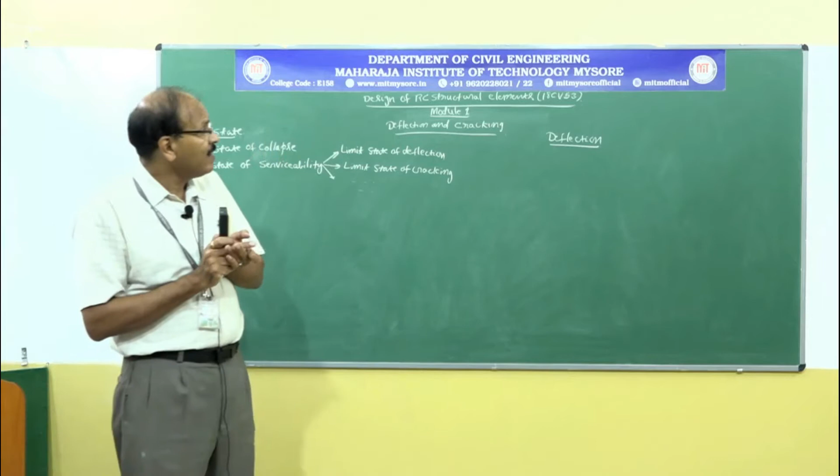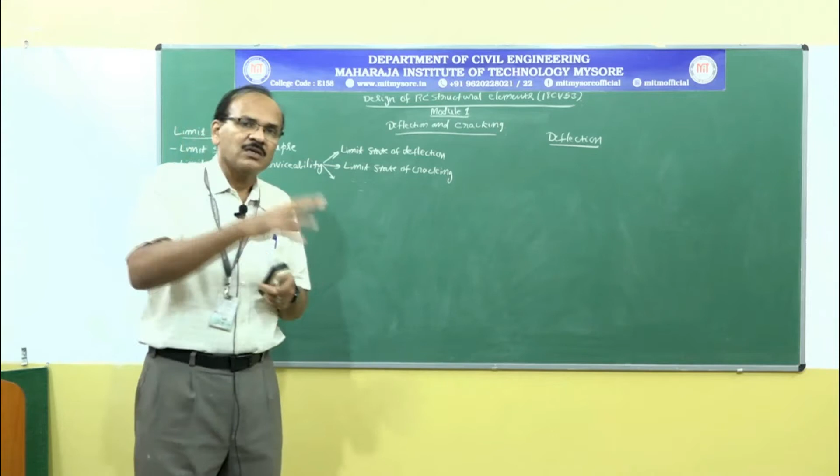Those are elastic deflections, and long term deflections are the deflections that happen due to shrinkage of concrete, temperature variation, and creep of concrete. Those are all long term deflection. So total deflection is short term plus long term deflection, and total deflection is normally 2 to 3 times the immediate or short term deflection.

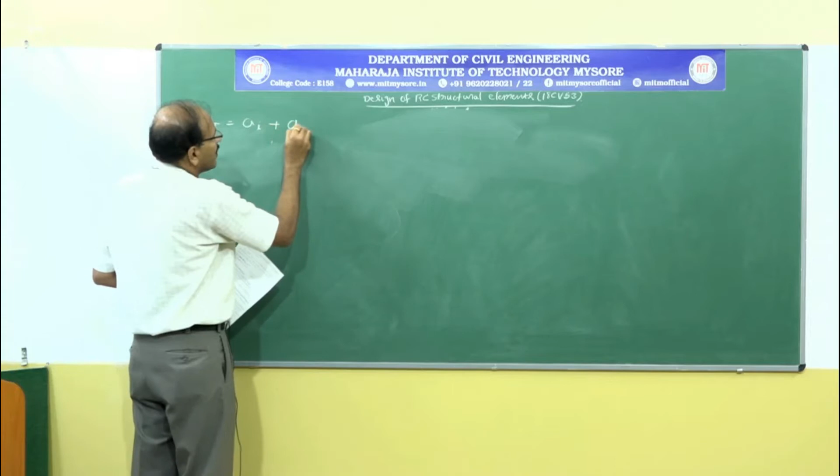To start with, let me take the deflection part. AT equal to total deflection: one is AI, the immediate deflection, plus ALT, the long term deflection. Short term deflection plus long term deflection can further be divided into ACS plus ACC plus ATP - that is deflection due to shrinkage, deflection due to creep, and deflection due to temperature change.

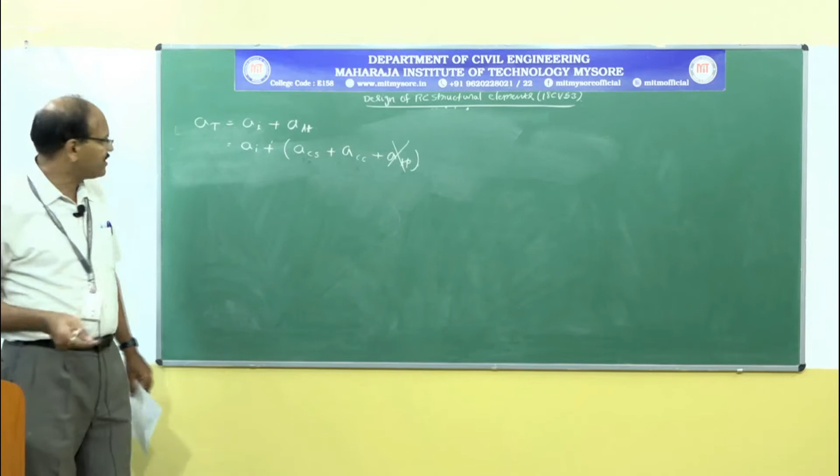In this class we don't deal with temperature deflection because it is not so significant under normal temperature. We are going to find out what is the total deflection of a structural element under these remaining cases.

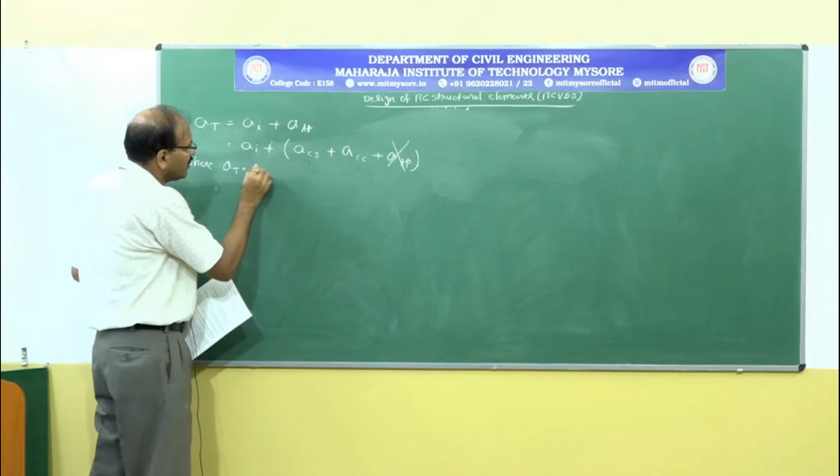AT equals total deflection, then deflection due to shrinkage of concrete and deflection due to creep of concrete. AI is short term or immediate deflection, and ALT is long term deflection.

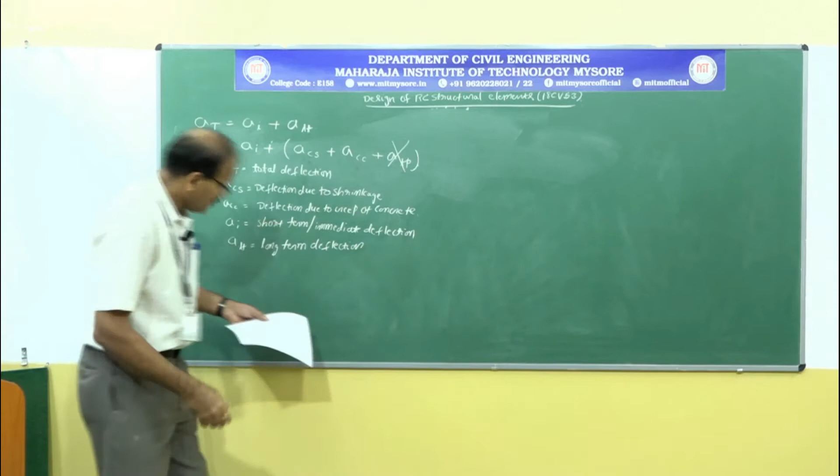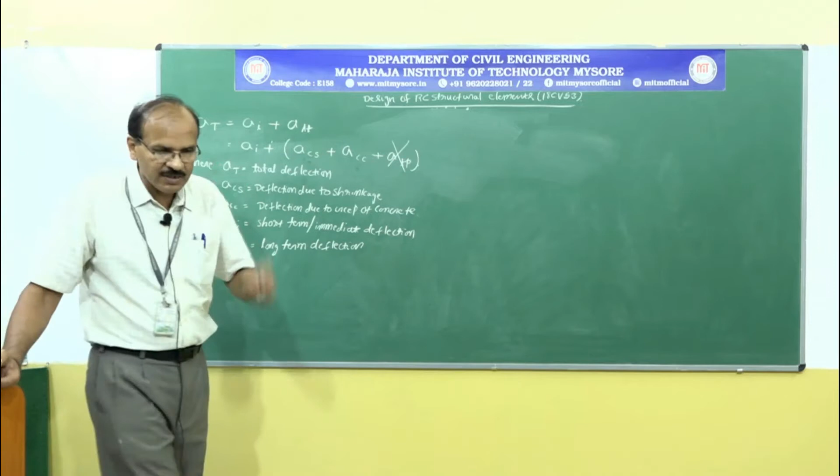Deflection should not exceed certain limits, and we have to keep the deflection as minimum as possible. So how do we keep the deflection as minimum as possible? As per the codal recommendation, we have to maintain certain L by D ratio. L is the span of the structural element and D is the effective depth. We have to maintain those values within certain limits so that deflection is under control.

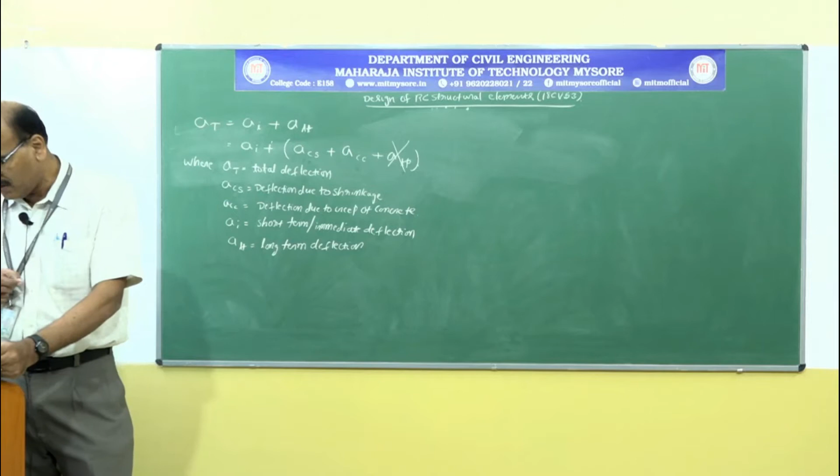If you go to page number 37 under clause 23.2, I am going to read out: the deflection of a structure or part thereof shall not adversely affect the appearance or efficiency of the structure or finished partitions.

The deflection shall generally be limited to the following: the final deflection due to all loads, including the effect of temperature, creep and shrinkage, and measured from the as-cast level of the supports of floors, roofs and all other horizontal members, should not normally exceed span divided by 250. What it means is the final deflection, that is the immediate deflection plus long term deflection, should not exceed or be greater than span divided by 250.

Again, the deflection including the effects of temperature, creep and shrinkage occurring after erection of partitions and the application of finishes should not normally exceed span divided by 350 or 20 mm, whichever is less. What that means is the deflection due to temperature plus creep plus shrinkage should not be greater than span divided by 350. What exactly it means is the total deflection should not exceed this much. The total deflection is the short term deflection plus the long term deflection, and it should not exceed this.

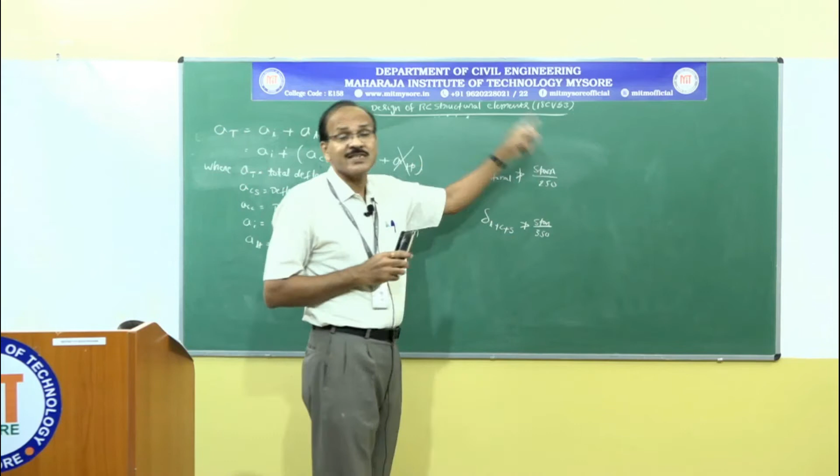Next, when it comes to control of deflection, we have to follow certain guidelines given by the code. When we follow those guidelines, the deflection will be under control, meaning these conditions are generally satisfied. So what are the codal recommendations? Under clause 23.2.1, it says the vertical deflection limits may generally be assumed to be satisfied provided that the span to depth ratios are not greater than the values obtained as below.

That means in the majority of cases, if we follow, for example for cantilever, the basic values of span to effective depth ratios for spans up to 10 meters is 7. For simply supported, it is 20. For continuous, it is 26. If the span of any structural element crosses 10 meters, we have to give certain corrections as per the codal recommendation. This is how we control deflection, and in some structures, if for practical reasons we cannot stick to these L by D ratio conditions, then go ahead and provide whatever the situation demands for the design.

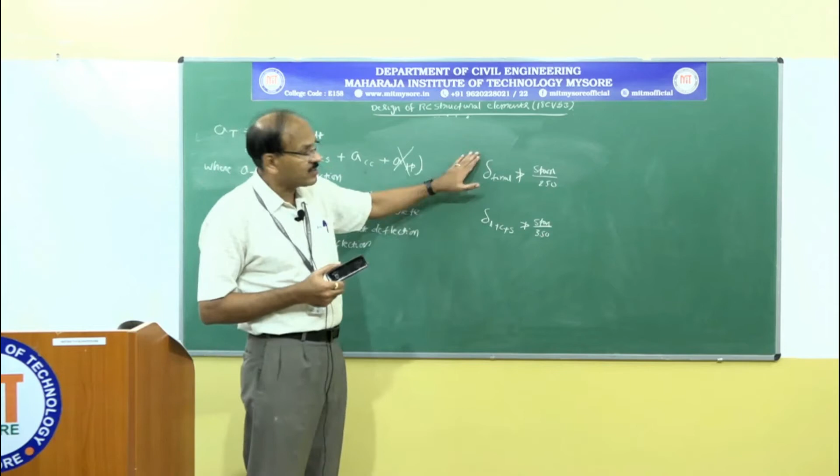In such cases, when checking for deflection, you have to check for the actual deflection using all the complex formulas given in the code. Once you calculate those values, make sure they satisfy these two conditions.

So next, how do we reduce the deflection? The deflection can be reduced in different ways, one being by increasing the depth of the section. When you increase the depth of the section, the moment of inertia increases. Moment of inertia comes in the denominator of the deflection formula, so once the moment of inertia increases, the deflection reduces. By increasing the depth, we can reduce the deflection significantly.

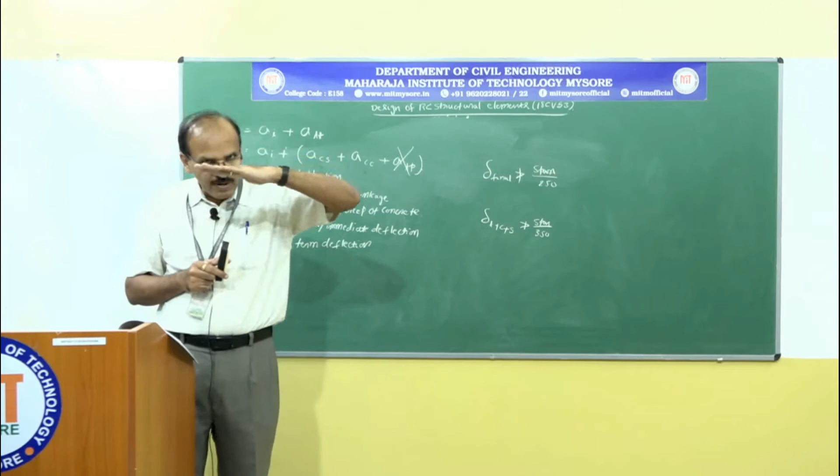Not only that, we can also reduce the deflection by widening the width of the structural member. For example, if I take a beam and increase the width, we can reduce the deflection as well. By using richer concrete, we can reduce deflection, and also by providing camber for the beam or slab at the middle within certain limits. Once you provide the camber, under self-weight and external load the slab or beam will try to flatten, which also reduces deflection. And also by making use of the T-section: when casting a beam along with the floor, it serves as a T-beam, so by adopting T-beam design we can definitely reduce deflections.

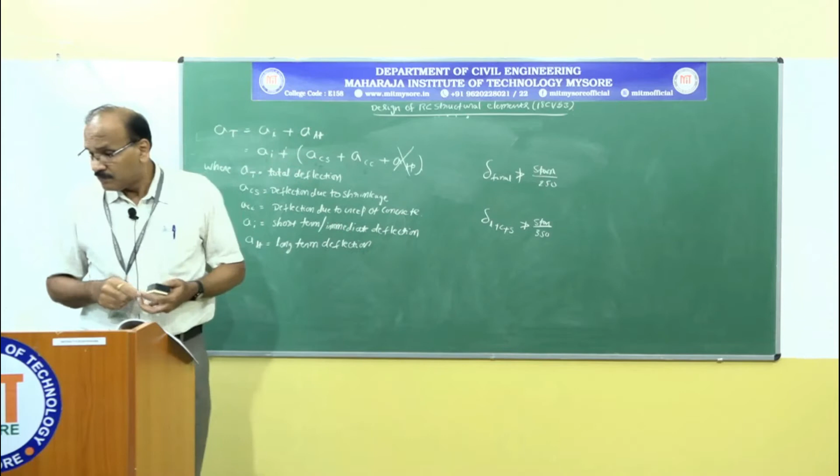Let us take up an example: a cantilever of 3.5 meter span, 300 millimeter wide and 600 millimeter deep. It is subjected to a maximum bending moment of 125 kilonewton meter due to uniformly distributed service loads, of which 50% of the moment is due to permanent loads. The beam is reinforced with 4 bars of 20 mm diameter at an effective cover of 50 mm in the tension zone. Check the beam for deflection.

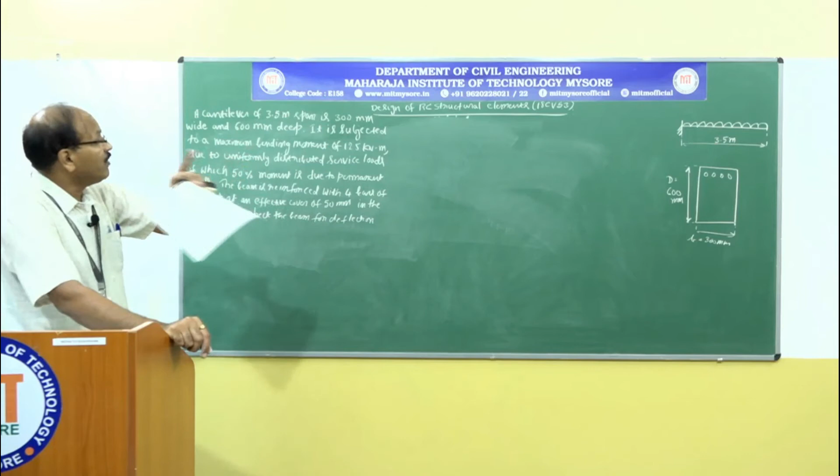It is subjected to a maximum bending moment of 125 kilonewton meter due to uniformly distributed service loads. Whenever we calculate deflection, we always make use of the service load, not the ultimate load or the design load.

Due to the service load, the moment we get is 125 kilonewton meter, of which 50% moment is due to permanent loads. So total service moment is 125 kilonewton meter, out of which 50%, that is 62.5 kilonewton meter, is the moment due to permanent loads.

The beam is reinforced with 4 bars of 20 mm diameter at an effective cover of 50 mm in the tension zone. Check the beam for deflection.

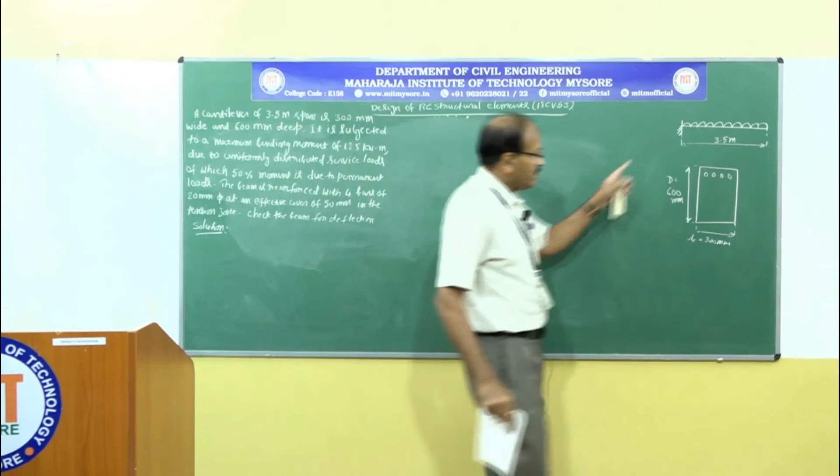Because this is a cantilever, tension happens at the top. That's why we provide reinforcement at the top, 50 mm cover, with 4 bars of 20 mm diameter, and we need to calculate the total deflection due to the load.

Let me write down what is given in the problem. Cantilever length L equal to 3.5 meter, breadth B equal to 300 millimeter, and total depth D equal to 600 millimeter.

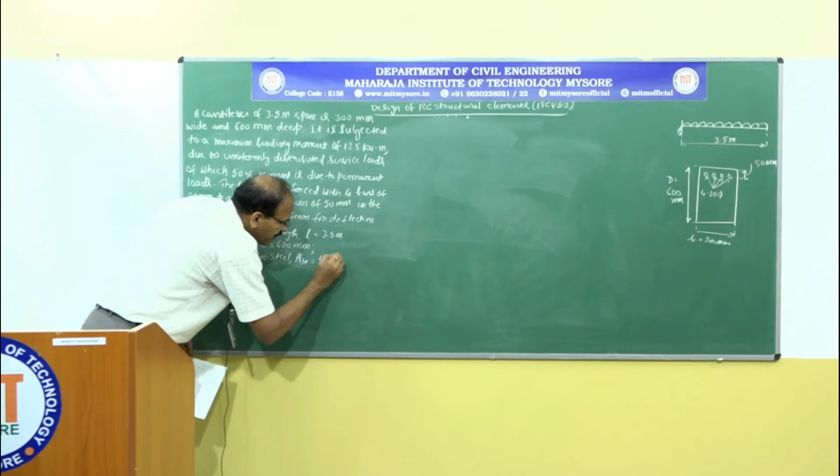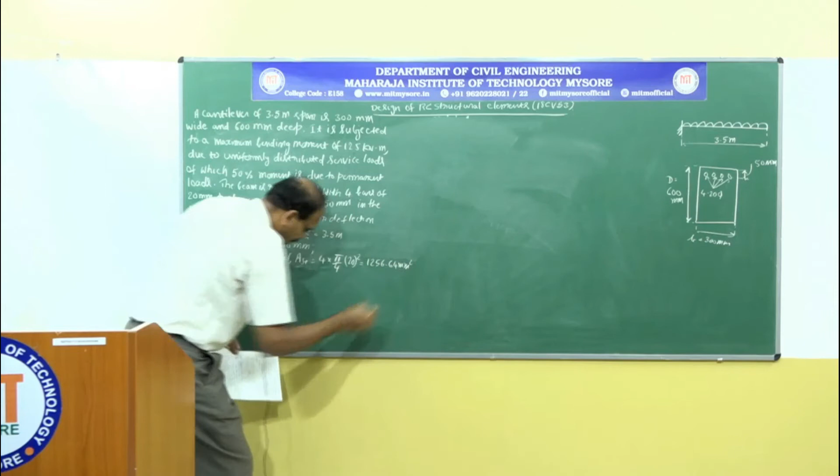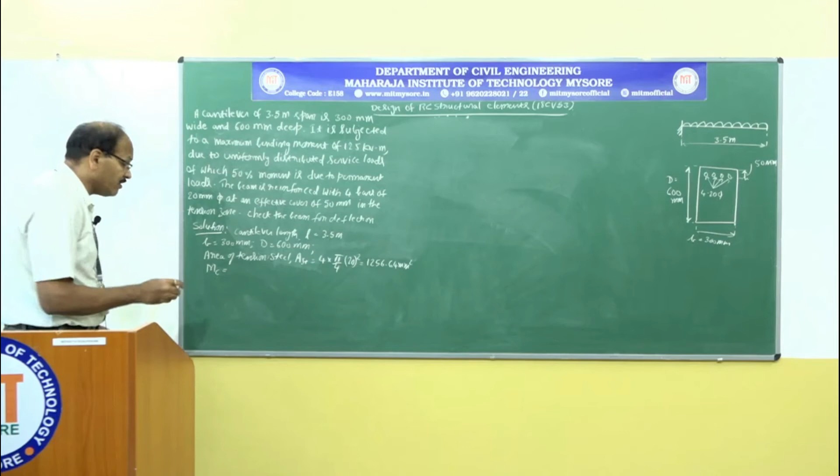Area of tension steel AST equal to 4 multiplied by pi by 4, 20 square, that is equal to 1256.64 millimeter square, and MC, that is the total maximum bending moment due to service load, is 125 kilonewton meter, or 125 into 10 to the power of 6 Newton millimeter.

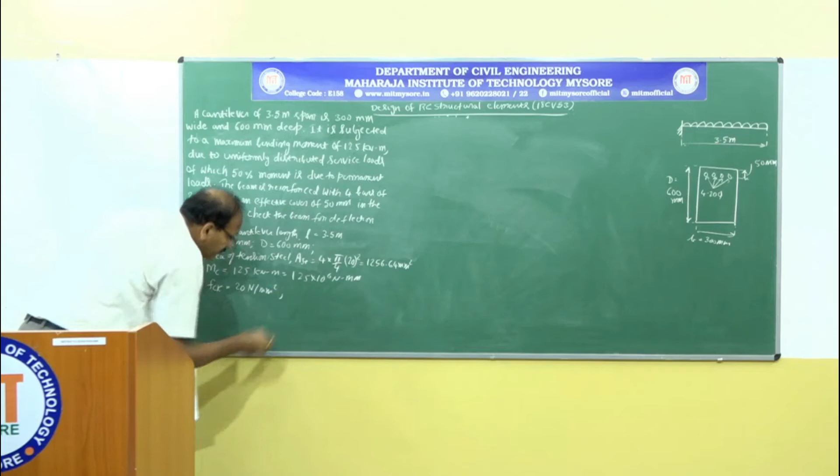The concrete we are going to make use of is 20 Newton per millimeter square, and the steel we are going to use is 415 Newton per millimeter square.

As we discussed, total deflection AT equal to AI plus long term deflection, that is equal to AI plus deflection due to creep and deflection due to shrinkage. I am going to call this equation 1.

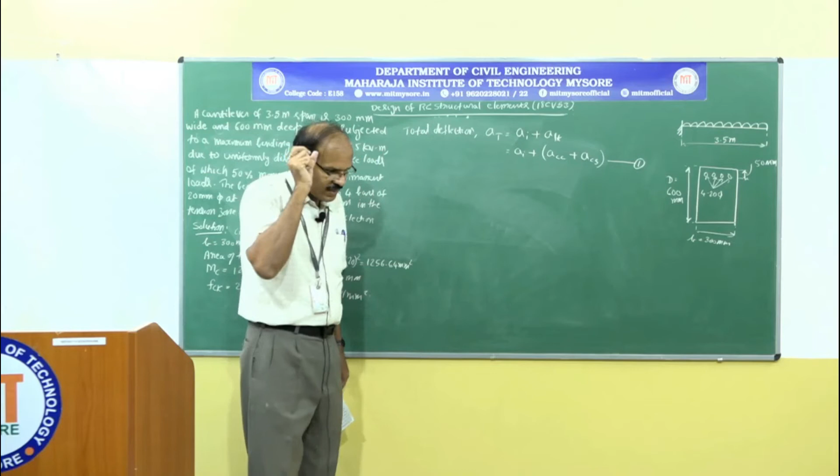I am going to find out one item at a time, and once I get all those individual deflections, I will put them into this equation to finally get the total deflection. Let me start with AI value, that is the short term deflection or immediate deflection.

Short term deflection AI. We have the formula for a cantilever: short term deflection AI equal to WL to the power of 4 divided by E, and I is effective, with 8 here. This is the formula to calculate the deflection for a cantilever beam under uniformly distributed load.

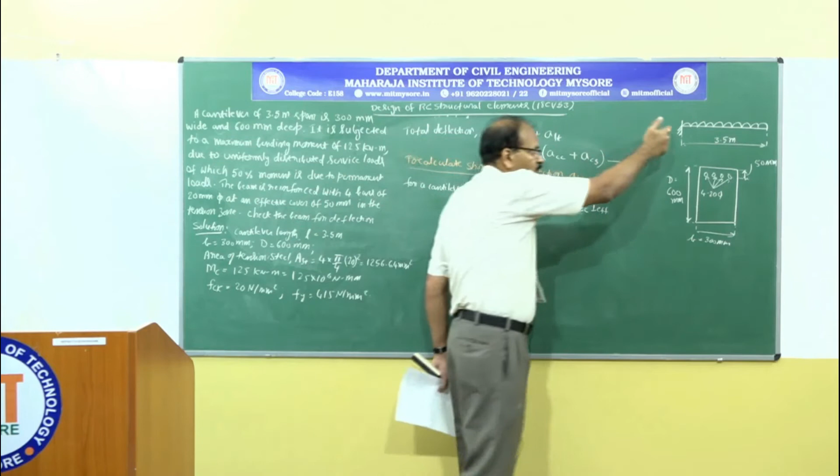I am going to split this formula this way, and I am left with L square divided by 4 EC I effective. So what is WL square by 2? WL square by 2 is the maximum bending moment at the support due to the service load, so that is equal to MC L square divided by 4 EC I effective.

Here MC is known because it's given already: MC is 125 multiplied by 10 to the power of 6 Newton millimeter. L is known, the length of the cantilever, which is 3.5 meter, that is equal to 3500 millimeter. EC is the Young's modulus of concrete, and IEFF is the effective moment of inertia of the section which we need to calculate. Let us find out each item at a time: MC is known, L is known.

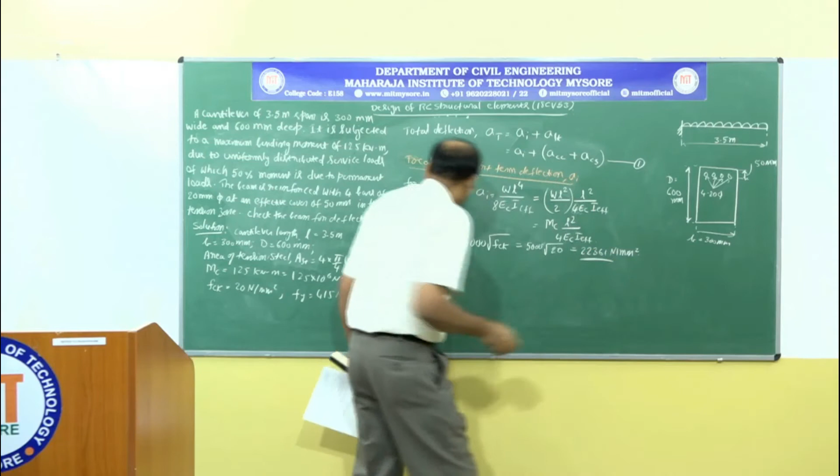Let us find out what is EC. EC equal to 5000 times square root of FCK as given in the code. FCK is 20, square root of 20, that is equal to 22361 Newton per millimeter square. That is the Young's modulus of concrete.

Now we will find out what is IEFF. The formula we are going to get is under annexure C, page 88 of the code book, and IEFF, that is the effective moment of inertia, is IR divided by 1.2 minus MR divided by M, Z divided by D, 1 minus X by D, BW by B.

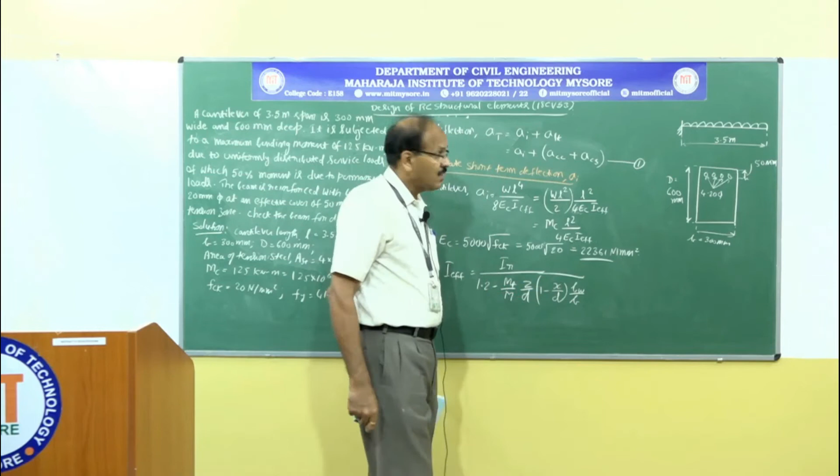So here what is IR? IR is the moment of inertia of the cracked section, and what is Mr? Mr is nothing but cracking moment, which we are going to find out using the bending equation in strength of materials. So M is nothing but MC value here, that is 125 multiplied by 10 to the power of 6 Newton millimeter, and X is the depth of the neutral axis from the compression edge, and D is the effective depth, BW by B. BW is the width of the web and B is the width of the flange.

If you are finding out the deflection of a T-beam, whatever T-beam width we are going to find out using the codal recommendation, we have to put here. But for a rectangular section, BW and B are one and the same, so this value is going to be 1. So let us take up IR, let me start from here to find out what is IR.

And of course, I forgot one step: IR should be less than equal to I effective, and that should be less than equal to I gross. So this is the moment of inertia of the cracked section, this is the effective moment of inertia, and this is the moment of inertia of the gross section. We have to make sure that this value which we are going to calculate lies between this and this.

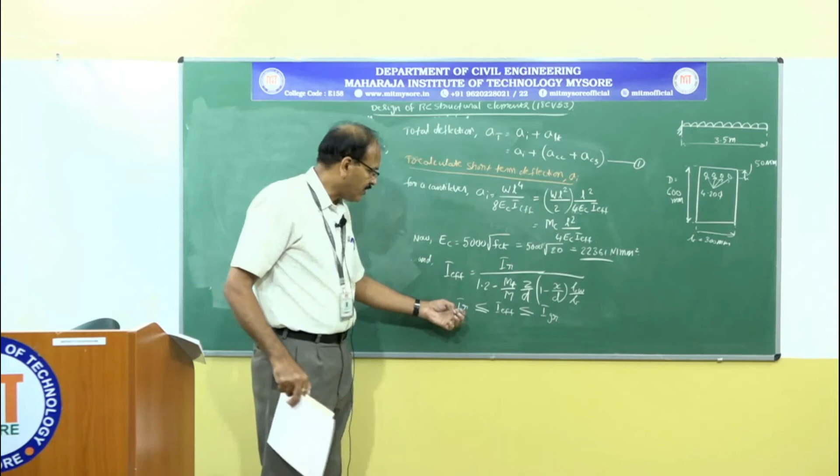So what if this value goes below IR? Then we have to take this value equal to IR. If this value goes above IGR, we are going to take IGR as I effective. So that is the way we are going to go. Let us find out what is IR first to start with.

That is moment of inertia of the cracked section, IR. So before starting the moment of inertia of the cracked section, first I am going to find out what is the modular ratio.

Modular ratio M equal to Young's modulus of steel divided by Young's modulus of concrete. Young's modulus of steel is 2 multiplied by 10 to the power of 5, and the Young's modulus of concrete is 22,361 Newton per millimeter square, which we calculated just now. After doing the calculation, we are going to get the value of modular ratio M equal to 8.94.

So to find out the moment of inertia of the cracked section, first we are going to find out what is the depth of the neutral axis. This is the depth of the neutral axis. Because this is cantilever, anything below the neutral axis is going to be subjected to compression. If x is the depth of the neutral axis from the compression edge, then I am going to call this as D.

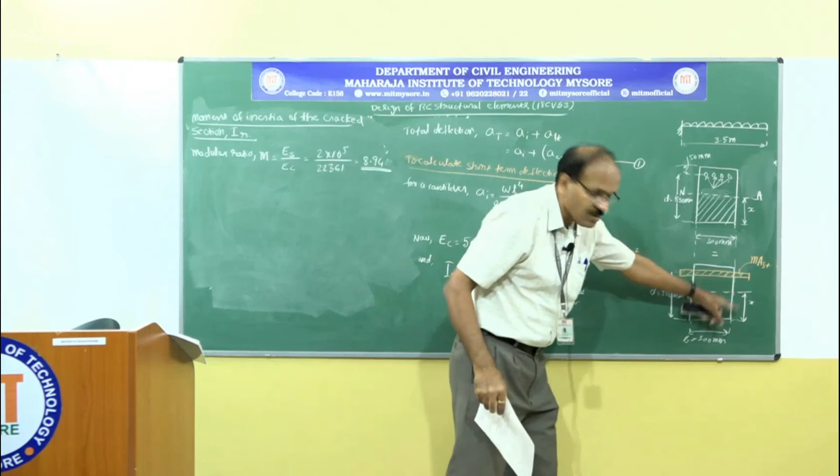And how to find out the depth of the neutral axis? Depth of the neutral axis can be calculated by equating the moment of area of the concrete about this axis on both sections, and equating those two moments. That is nothing but to find out X by equating moments of areas in both tension and compression zone about the neutral axis.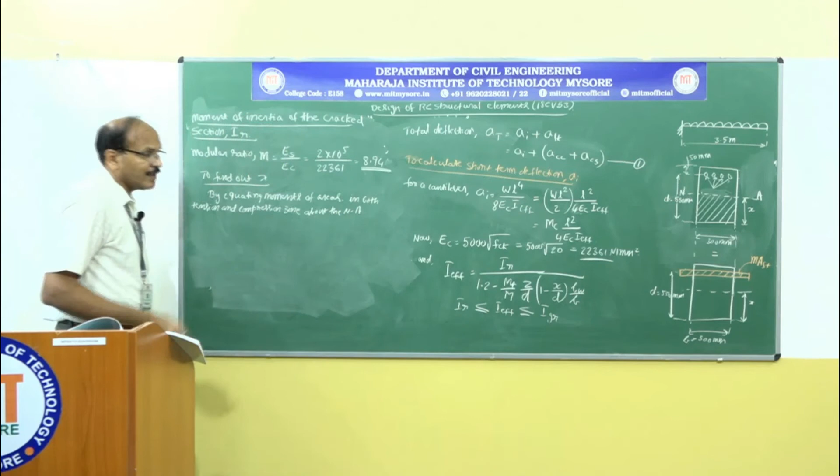So that is moment of the tension area of concrete about the neutral axis is given by M into AST, that is the equivalent concrete area, and D minus X is the distance of the centroid of the equivalent concrete area from the neutral axis. That should be equated to B times X, the area of the compression zone, and the distance of the centroid of the compression zone is X by 2 from the neutral axis. So here B is 300, X square by 2. I am going to take this side, MAST.

So MAST is plus 8.94 into 1256.64 and X minus 8.94 into 1256.64 into D is 550. So finally this will reduce to X square plus 74.90X minus 41192.66, that is equal to 0. Therefore X equal to 168.94 millimeter. That is the depth of the neutral axis.

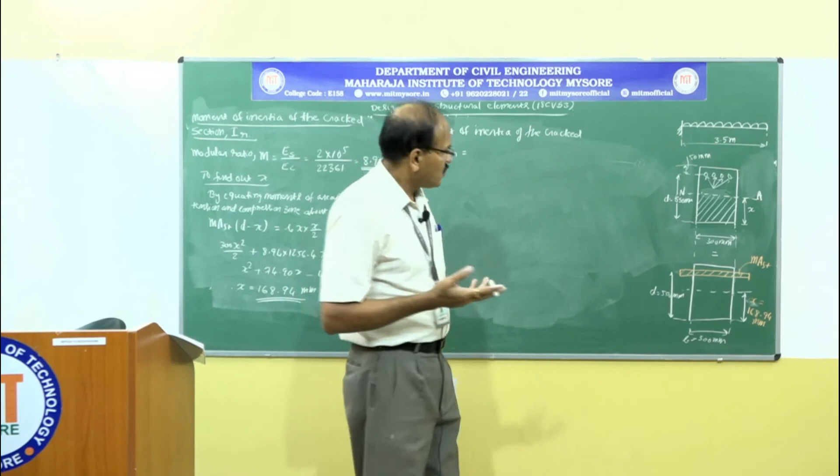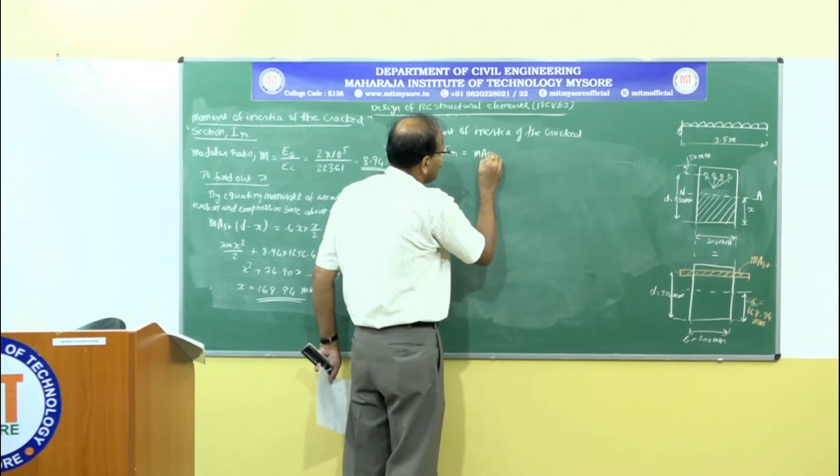So I am going to take the moment of inertia of this about this neutral axis, that is MAST, and the distance is D minus X square, and the moment of inertia of this compression zone is given by B D cube. B is 300, D is X cube by 3. This is a rectangle, and the moment of inertia of this rectangular portion about its own centroidal axis is BD cube by 12.

If we take the moment of inertia of the same rectangle about the base, it is going to be BD cube by 3. Here D equal to X, that is the depth of the neutral axis. So that is BX cube by 3. Substituting all values: 8.94 into AST is 1256.64 and D is 550 minus X is 168.94, plus 300 into 168.94 cube by 3. So IR equal to 21.13 into 10 to the power of 8 millimeter to the power of 4. That is the moment of inertia of the cracked section.

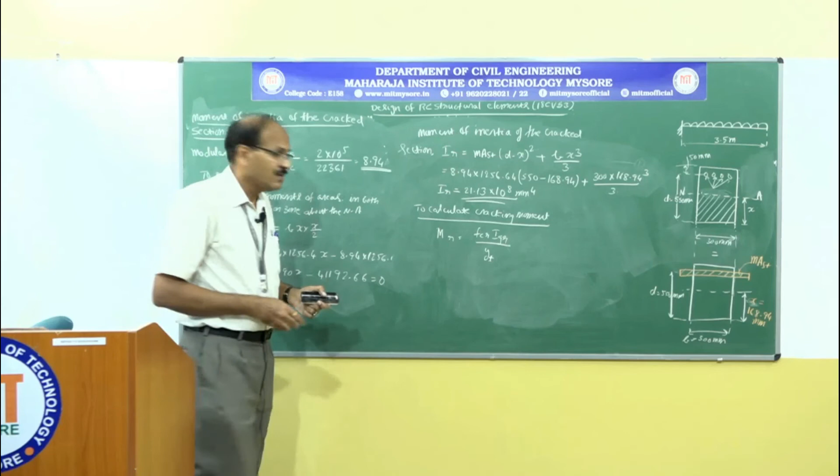That is the formula for calculating the cracking moment, given in C 2.1 under Annexure C on page 88 of the code book. So FCR, what is FCR? That is the modulus of rupture of concrete, FCR equal to 0.7 square root of FCK, that is equal to 0.7 square root of 20, that is equal to 3.13 Newton per millimeter square.

Then what is IGR? That is the moment of inertia of the gross section. IGR equal to 300 multiplied by 600 cube by 12, that is equal to 54 into 10 to the power of 8 millimeter to the power of 4.

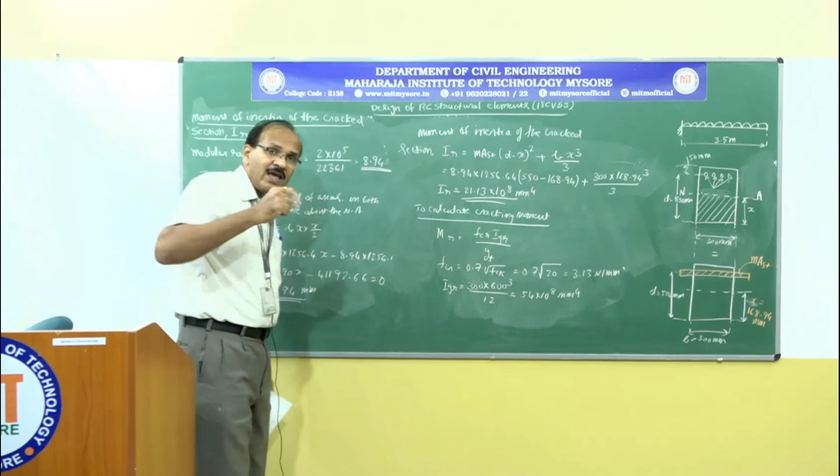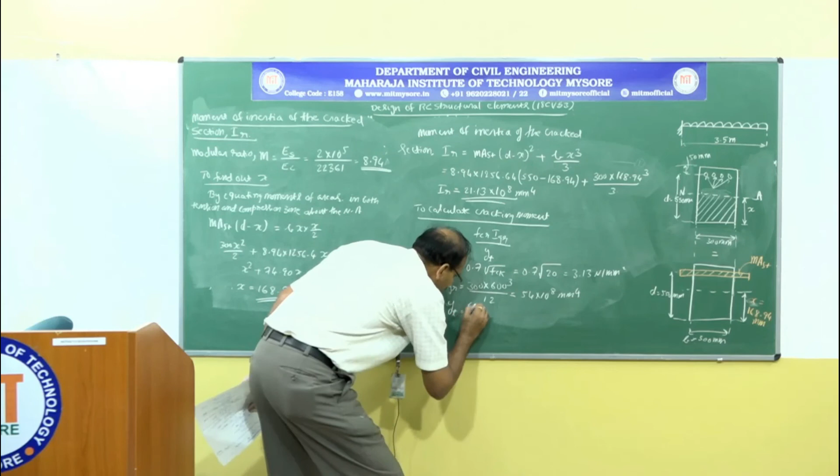Next, what is YT? YT is the distance of the extreme fiber from the neutral axis. It is going to be half the depth of the section. So YT equal to 600 by 2, that is equal to 300 millimeter. Now we know all the values, we can find out what is the cracking moment MR.

Therefore, MR equal to FCR, that is 3.13, into IGR 54 into 10 to the power of 8, divided by YT is 300 millimeter. So the cracking moment is 56.34 into 10 to the power of 6 newton millimeter. That is the value of the cracking moment.

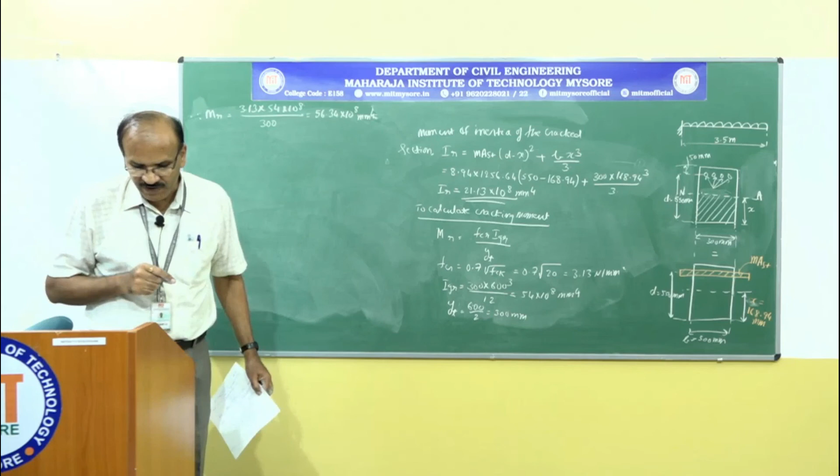Next, if you look at the equation of IEFF, that is the formula of IEFF, there is one term called Z, which is the lever arm. Lever arm Z equal to the distance from the centroid of the tension steel to the centroid of the compression zone.

Here we assume the linear variation of stress in concrete. As a result, the resulting compressive force is going to be located at a distance of x by 3 from the edge of the compression zone. So lever arm is given by D minus x by 3, that is equal to 550, and the value of x by 3 is 168.94 by 3, that is equal to 493.7 millimeter, which is the lever arm.

Now by substituting all the values, if you go to that equation given in the code, IEFF equal to IR divided by 1.2 etc. We know all the values here, so once we know all the values, substitute them to get the value of I effective.

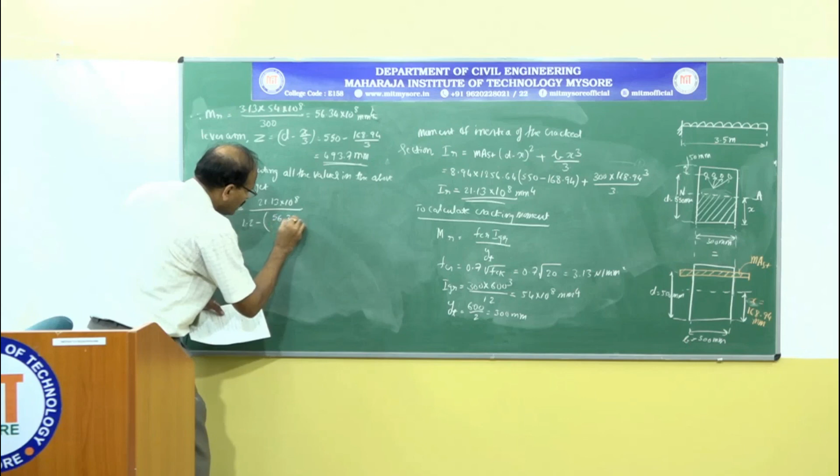We get I effective equal to 21.13 into 10 to the power of 8 divided by 1.2 minus 56.34 into 10 to the power of 6 divided by 125 into 10 to the power of 6, multiplied by 493.7 divided by 550, multiplied by 1 minus 168.94 divided by 550, multiplied by BW divided by B, which in this case is 1 for a rectangle section. So I effective is 22.97 into 10 to the power of 8 millimeter to the power of 4.

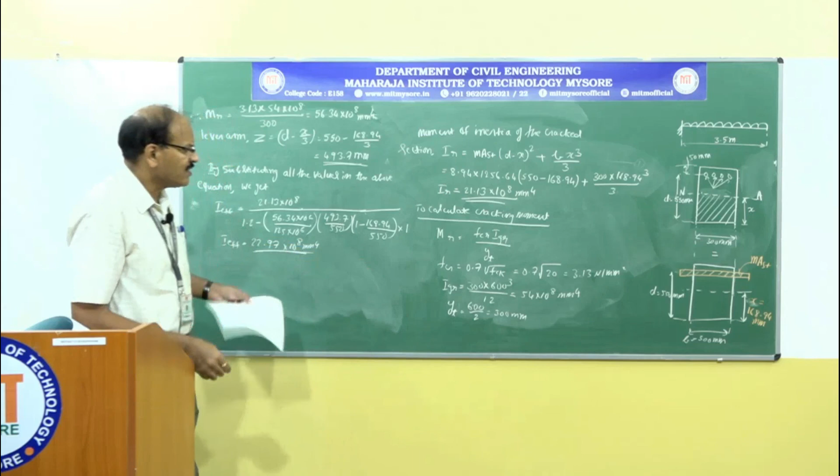In this equation, just make sure moment of inertia of the cracked section IR is less than or equal to IEFF, and that is less than or equal to I gross. In this case, yes it is true. IR is less than this value, and this value is less than I gross. Therefore IR is less than I effective, and I effective is less than I gross.

Now we calculated the moment of inertia. Next we need to calculate what is the short term deflection.

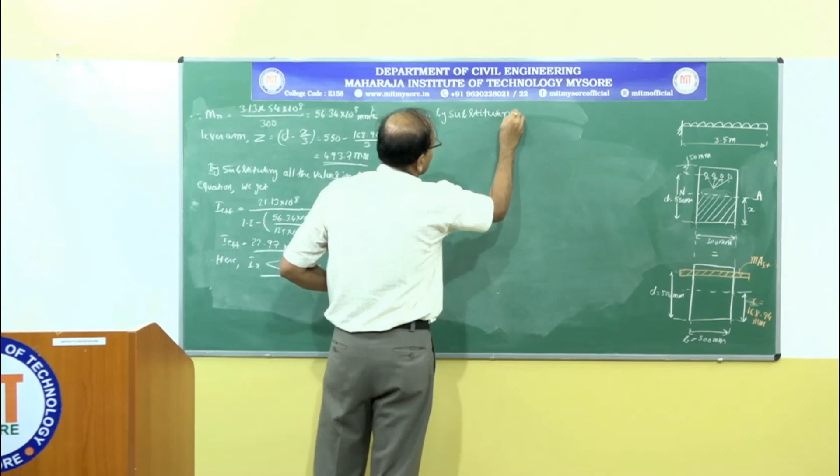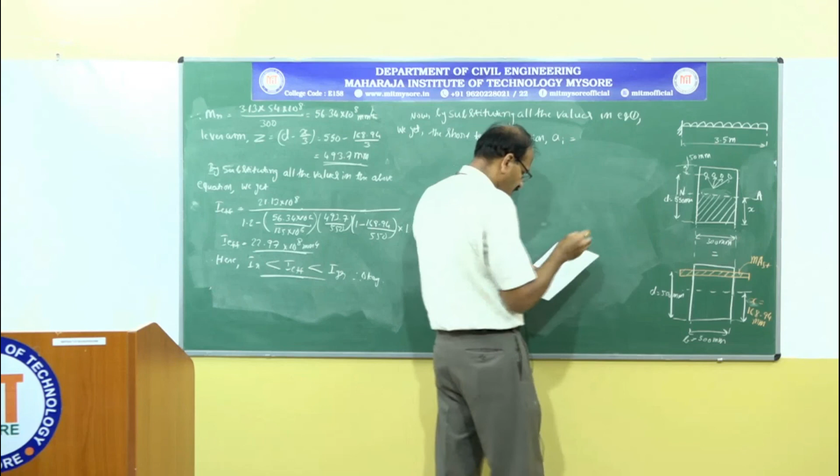Now by substituting all the values in equation 1, we get the short term deflection AI equal to 125 into 10 to the power of 6, multiplied by 3500 square, divided by 4 into 22361, into 22.97 into 10 to the power of 8.

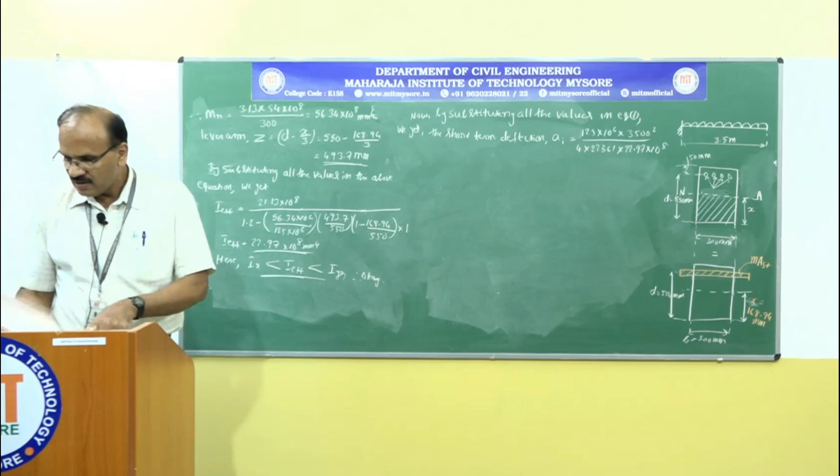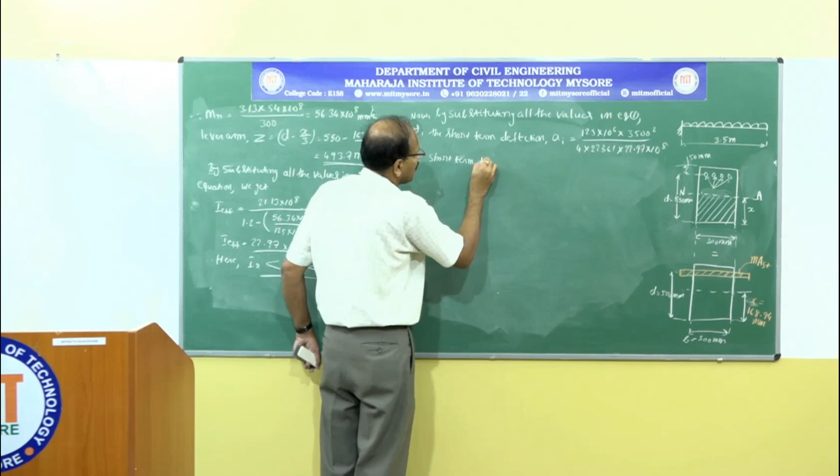So after simplification, we are going to get the short term deflection. Therefore, short term deflection or elastic deflection equal to 7.45 millimeter.

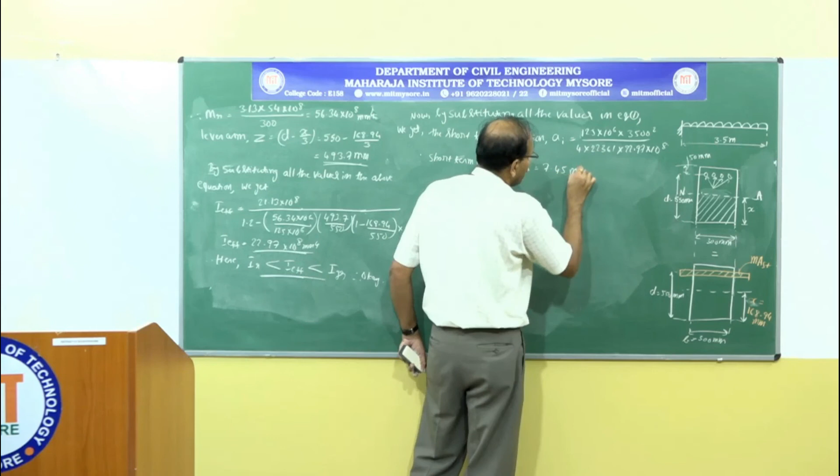Next we are going to continue with the deflection due to shrinkage.